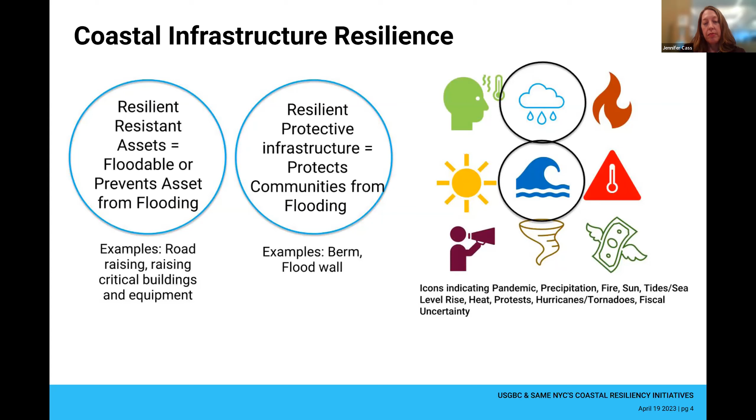The other circle you see on the right is a type of asset that we might build to protect a community from flooding. So Greg is going to focus on LMCR battery, but we have a whole portfolio here that's looking at how to protect Lower Manhattan from flooding again. So that could take many shapes. It could be a berm, it could be a flood wall, many other types of structures, but those are 2 of our prototypes.

So I'm going to just touch a bit on our Raise Shorelines portfolio that we've been working on with Stantec for several years. We conducted a study in 2016 with Moffatt and Nichol that looked at the entire coastline of New York City and tried to identify where sea level rise could be causing flooding for the entire shoreline. And we whittled that analysis down to a shorter list of projects, and through more and more analysis, we identified some projects that were occurring in other areas and projects that did not have any kind of coastal or sea level rise protection planned for it. And we identified these 5 project sites that you see on the screen.

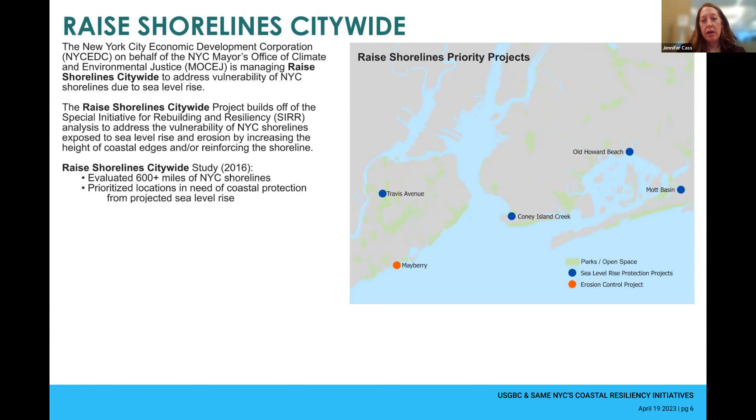So we're going to talk today about Travis Avenue and Mott Basin. It just kind of gives you an overview of the type of projects that you can see through a coastal resilience lens. They're quite different projects, but they both came out of the study and are, like I said, focused on sea level rise protection. The other thing that's very interesting to me about these two projects, even though we are designing for a future sea level rise, both of these locations experience flooding today. So they are really providing immediate benefit to the community.

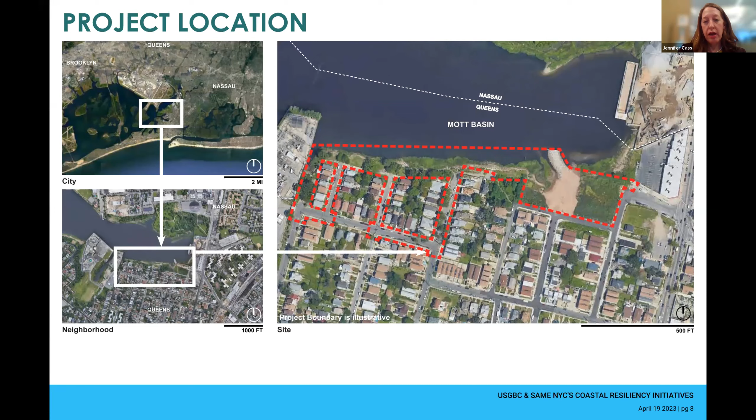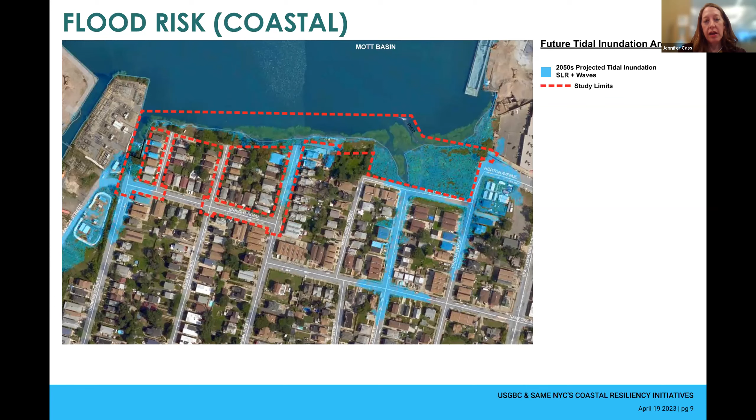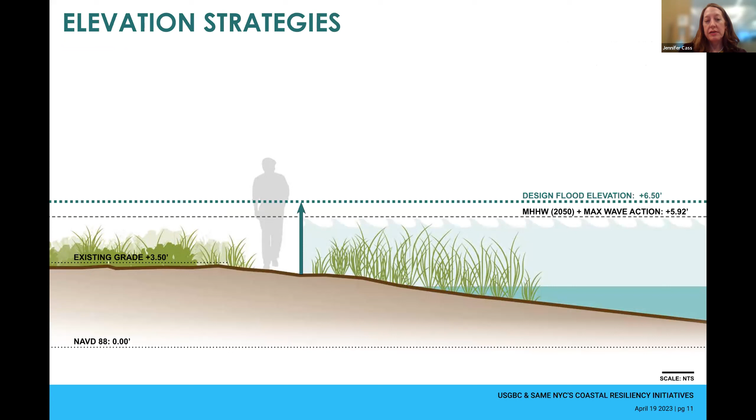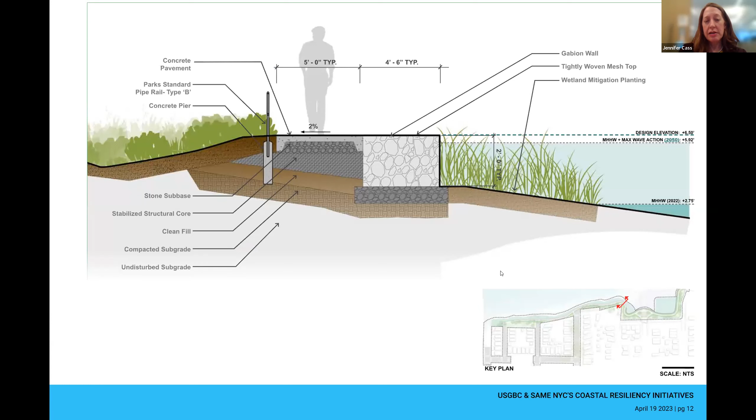So this is the Mott Basin location. This is in Jamaica Bay, right on the border of Queens and Nassau County, kind of the southern shore there. So in the blue, you can see the 2050 projected sea level rise that will come and inundate the neighborhood. But like I said, they do experience flooding periodically today, not quite to these extents. So Greg has put together some great slides that show the existing condition and the mean higher high water. And we're going to progress to show through the 2050s. And then we get up to a design flood elevation of 6.5 here. And the system that we've worked with Stantec to design here is a berm type of wall. A berm/wall, excuse me.

Thank you, guys. We can go back to the previous slide, actually. Yeah, I'm having trouble doing that. We can keep you here.

But we've worked with the City Parks Department. The majority of this project site is on New York City Parks property. And we've worked with them to really create this as an asset to the community. So we're not just building a wall or building a berm that is protecting the community from coastal flooding, but we're also creating an asset. People can have a walkway here. There's benches for a nice stroll along the waterfront, and really provide people access to the waterfront here, which right now is not accessible.

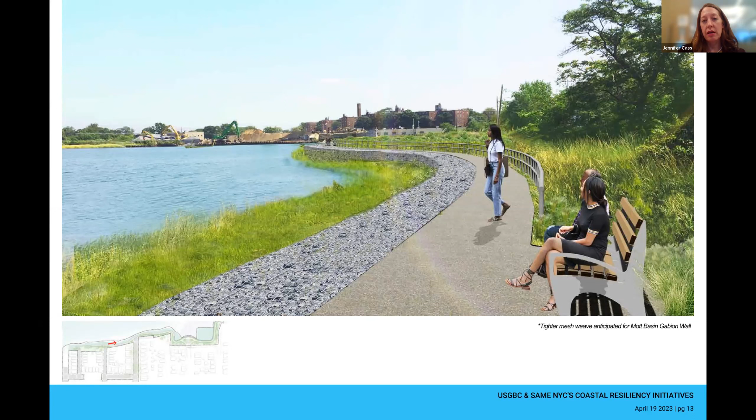Okay, then we're just going to talk a little bit about the Travis Avenue location. That's also part of the Raise Shorelines project. This is out in Staten Island near the West Shore.

Excuse me, getting over a cold.

So this project is in the middle of a wetland, but there's a road here, and like I said earlier, it floods pretty frequently, I think about 10 times a year. This road is not usable. It's a local road, but it is a major shortcut for a lot of the community.

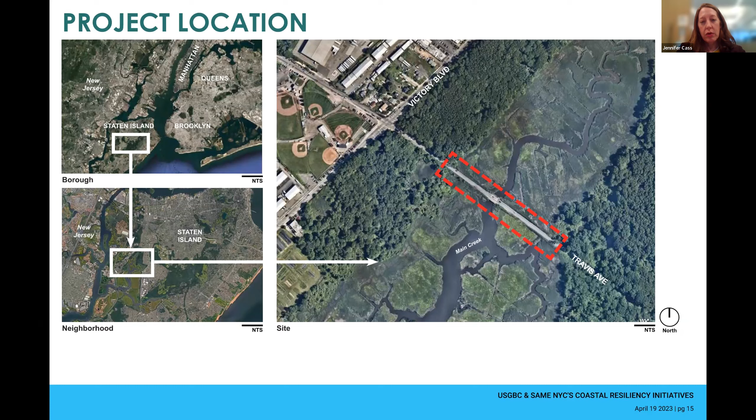You can see the ball fields over there. There's a Trader Joe's on the other side of the road. One of my colleagues actually lives just off to the right of this screen. So there's housing over here. So it's an important road to the city.

And it's really been a long road to get this project developed, but it includes a lot of innovative design features. So we wanted to protect the wetland, like I was saying on our first slide, as much as possible, because on either side of the road, there is a very large wetland that is a huge asset to the city. So by raising the road, we had concerns from the Parks Department that we would not be able to maintain as much flow to the north side.

Excuse me, I'm just going to take a drink of water.

We wouldn't be able to provide as much flow to the north side of the wetland. So we did some analysis with Stantec and found that by adding these hydraulic culverts, we would be able to maintain a more even flow to either side of the wetland.

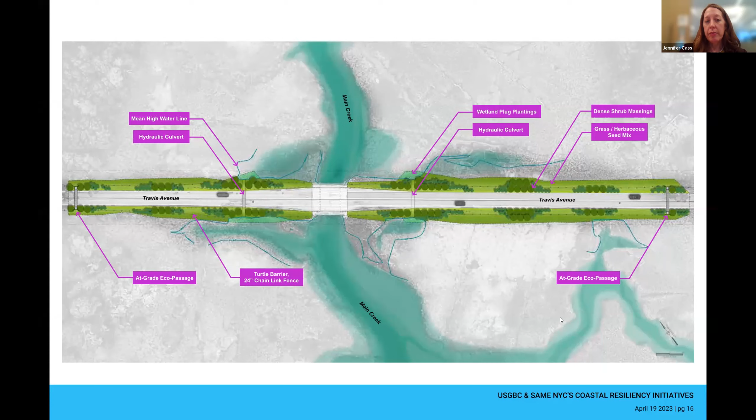The other thing that we did was we have added some eco passages for these little orange turtles you see, although they can be used by any kind of critters crossing under the roadway. And we were going to be the first eco passages in New York City, but I think some were installed out in Queens somewhere already. So these would be the first in Staten Island.

And it's really an innovative design. You can see the grate at the top that provides light. So the animals are kind of welcomed to crawl underneath the road. They're not really enticed by having to crawl through a dark tunnel. But we've heard stories about people having to pull their car over to pick a turtle up and usher them to the other side of the road so they don't get hit. And we hope that this is used by various other natural resources as well.

And the project is interesting because there's a bridge here, you can see, but we are leaving the bridge in place. We're raising the road on either side of the bridge, and that will bring it out of the flood zone so that we can have a more clear passageway, and it will protect this road in the future from flooding.

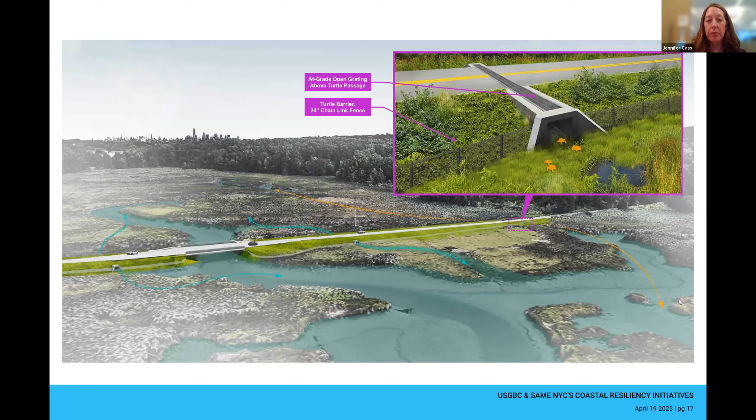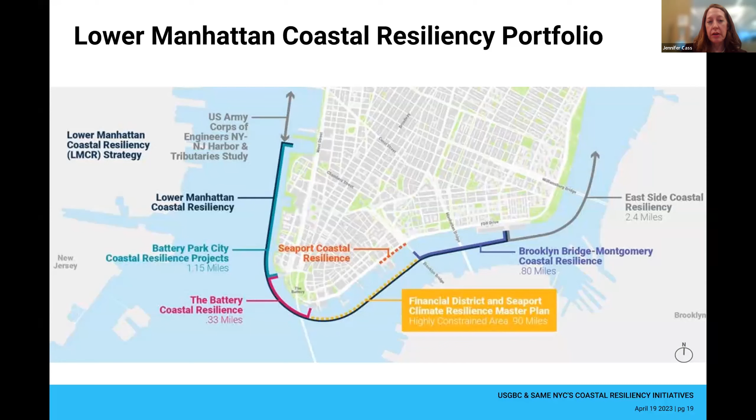EDC is actually working on the section from the Battery, the pink area, all the way up to the blue, the Brooklyn Bridge Montgomery Coastal Resilience Project. But we had done a study that looked at this entire area and identified projects that would kind of spin off of that. Over on the west side, you see also Battery Park City Authority is developing a series of coastal resilience projects along the Hudson. And then we're connecting up to the East Side Coastal Resiliency Project, which DDC is building.

So the way this project has worked is very innovative. We developed a master plan that looked at the entire shoreline. And then as certain projects were identified within the master plan that had fewer roadblocks, we've pushed them forward. So the first project to come out of the original master plan was the Battery. I'm going to leave that aside because Greg's going to dig into it quite a bit. And then the second project to come out of that was the Brooklyn Bridge Montgomery Coastal Resilience Project.

And they're very different projects. The Battery is a wharf raising project, whereas BMCR, as we call it, is actually raising the grade a bit and also providing a series of floodgates. So underneath the FDR over here, there are a series of floodgates that will be installed.

Construction is underway. DDC is managing the construction, and that will actually protect this zone from a 500-year storm.

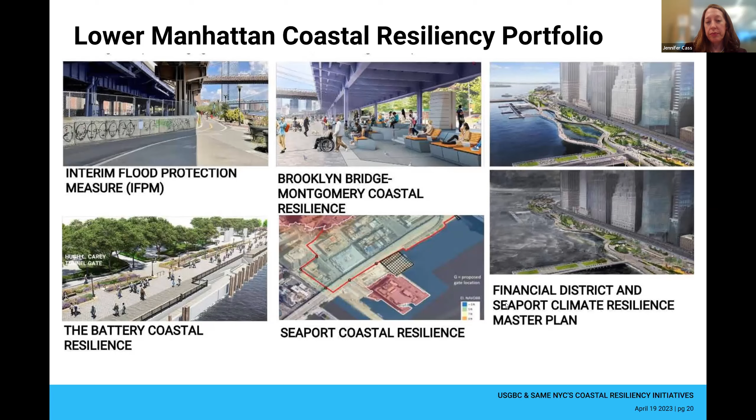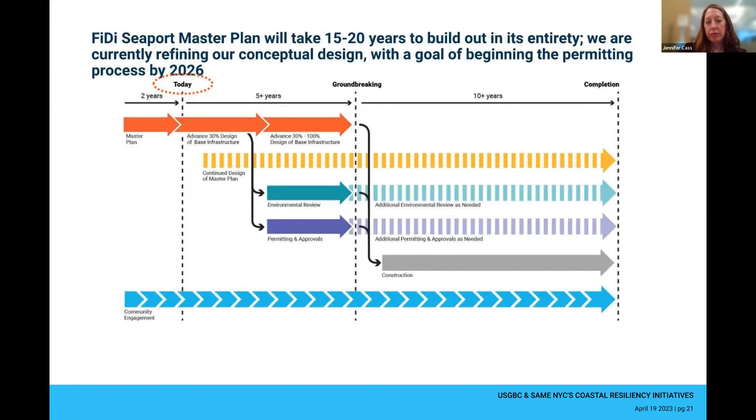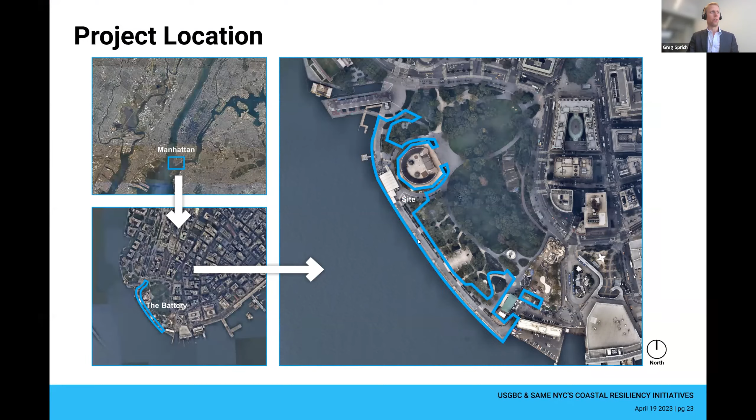Thanks, Jen. Going to talk a little bit about the Battery specifically. This is at the lower tip of Manhattan, as part of that LMCR initiative. And as Jen said, this is a wharf raising project — we are predominantly reconstructing the esplanade and the waterfront structure here at the Battery.

As we mentioned at the beginning, this project and all of these LMCR projects are looking at both sustainability and resiliency, and how those come together — specifically with climate mitigation, preventing future climate change impacts, and climate adaptation, adapting to climate change impacts. They're not independent; these approaches need to be looked at simultaneously in all of these coastal resiliency projects.

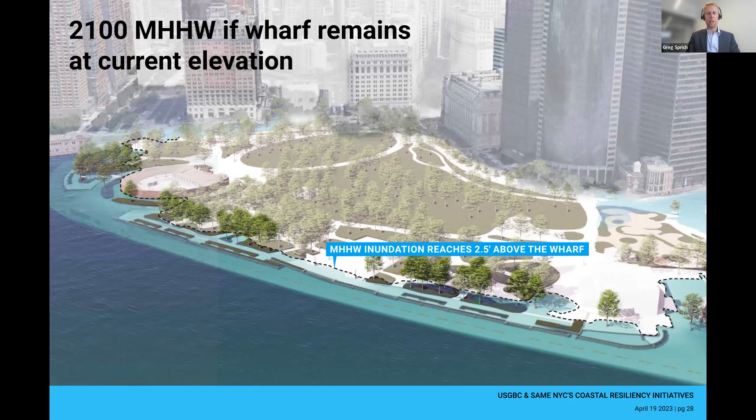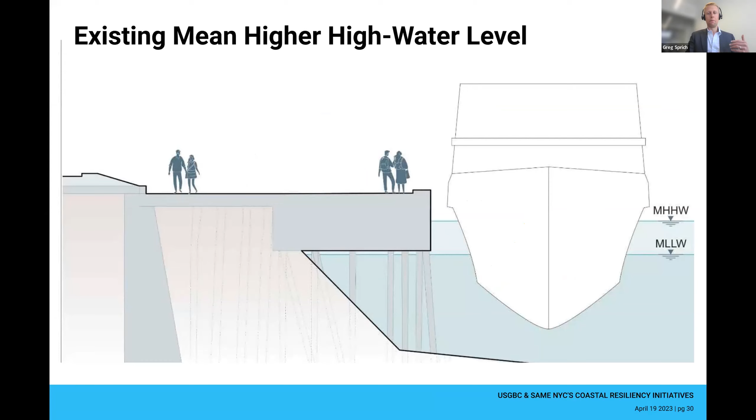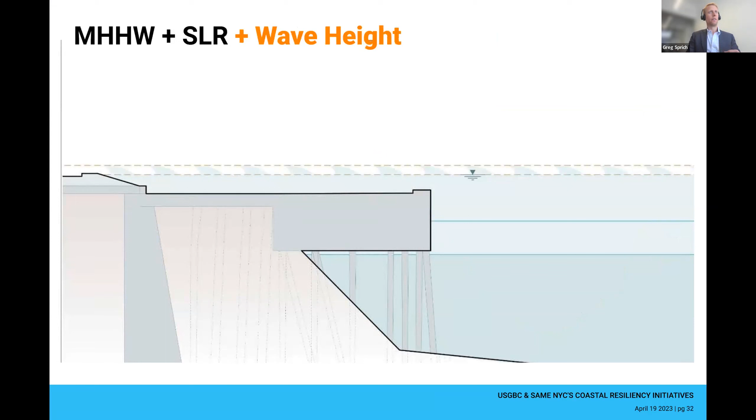Similarly, if you look at the wharf in section, and you add 6.3 feet of sea level rise — that's the 2100 projection — plus wave height and a bit of freeboard, our new wharf design elevation is about 5 feet higher than it is currently today. You can see in this cross section the public berthing vessels in 2100 with an elevated wharf and elevated sea levels is not a problem.

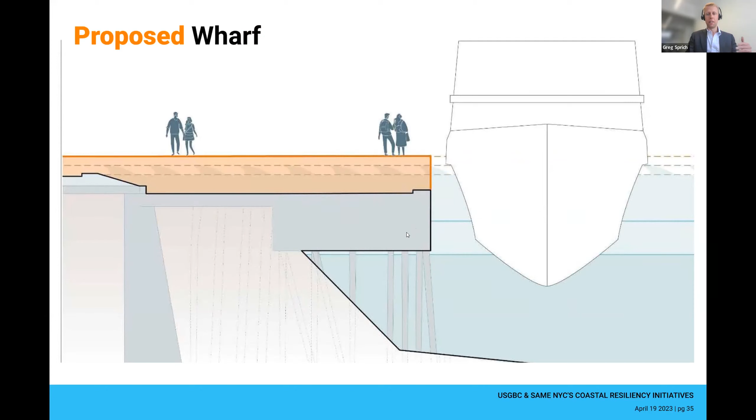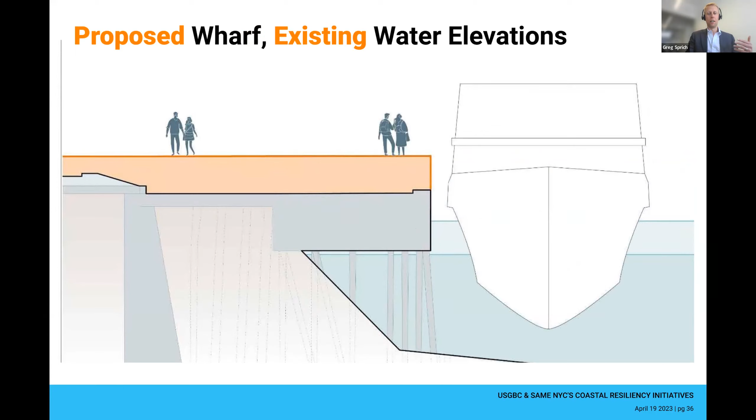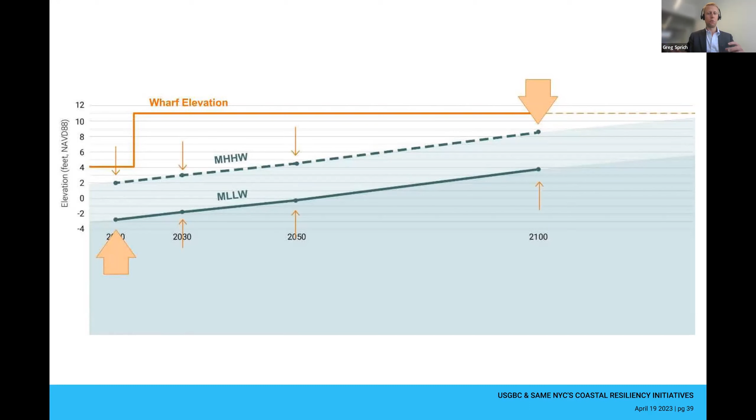However, the wharf must remain operable at today's current levels, which presented a major design challenge for the project, because we're designing for the future but also recognize the importance of accounting for present day operability and livability. So we couldn't just design for two endpoints of the project — as soon as it opens and then looking ahead 80 years to 2100 — we also needed to consider all of the points in between, as sea levels theoretically rise gradually.

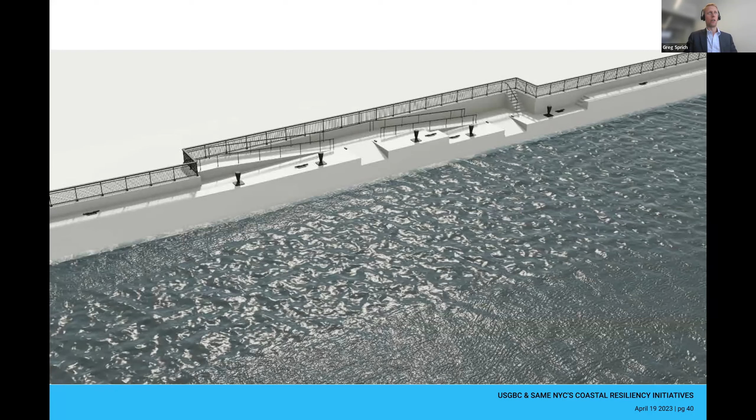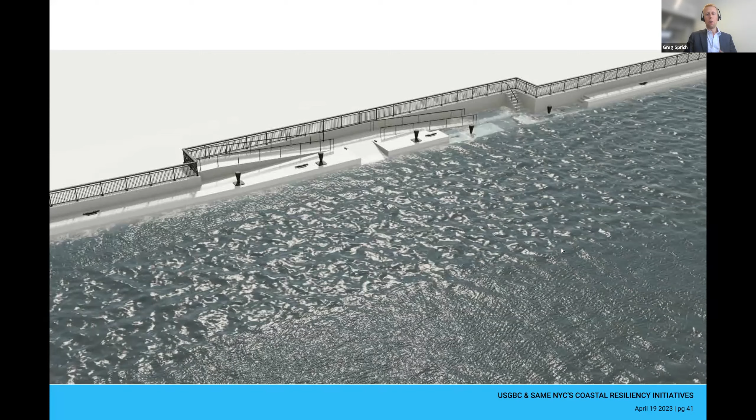So for the Battery, the design solution became a series of ramps down to two boat slips at differing elevations. Even in today's condition, both slips can be utilized based on low or high tides, and as sea levels rise, vessels will tend to use the higher slip more frequently. If sea levels rise as predicted, we recognize the lower slip will flood; however, the wharf design allows for this structure to be adaptable and flexible, so it can be built up to account for rising sea levels without having to fully rethink or redesign the structure — making our project adaptable and flexible for the future.

So specifically, spoke a little bit about how the project adapted to climate change, but how did the project mitigate against climate change or provide climate mitigation?

So we really looked at reducing greenhouse gas emissions by performing a life cycle assessment across all the proposed materials of the project. Simply put, the life cycle assessment means evaluating environmental impact of a product through its entire life cycle - the extraction of the material, the manufacturing, the transportation for how that material gets to the project site, the construction, and end of life.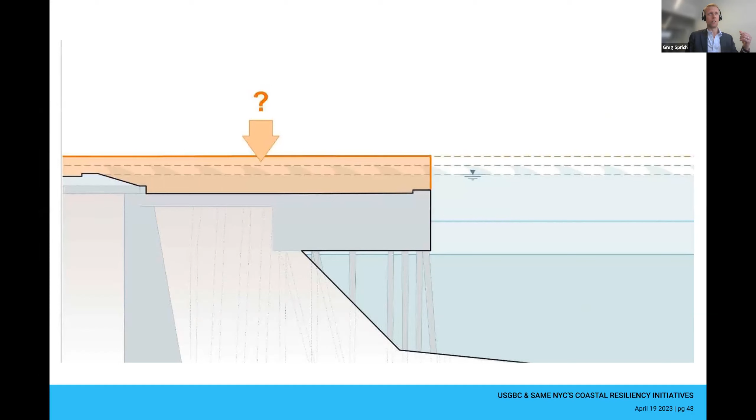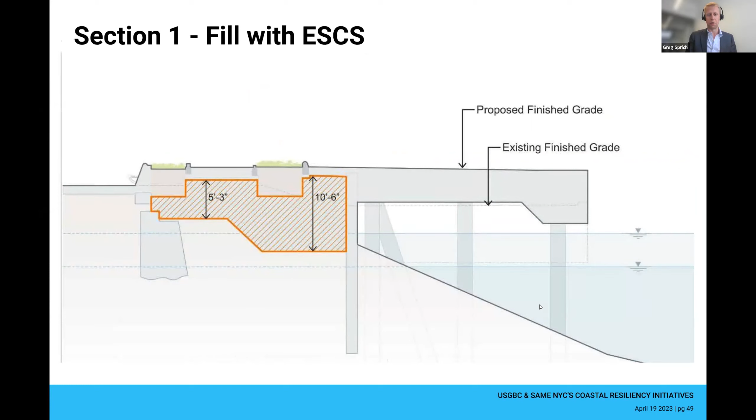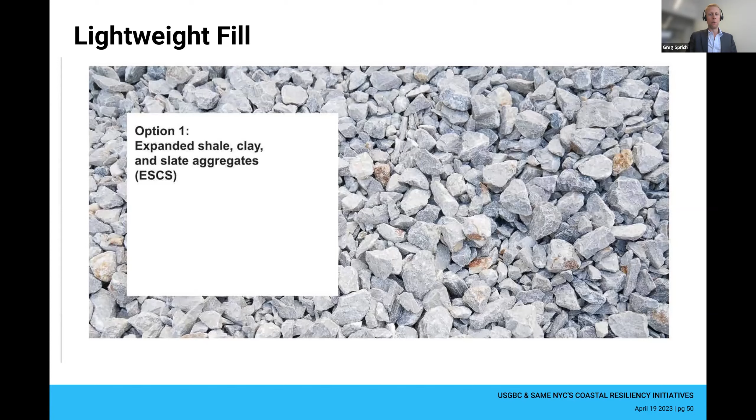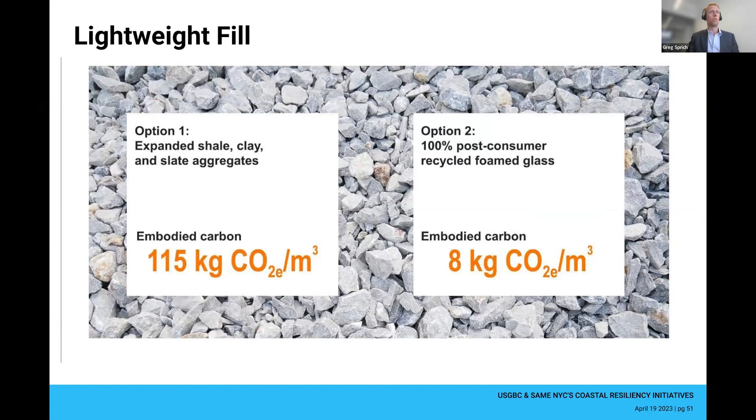So naturally, the initial thinking is you need to incorporate some sort of lightweight fill. We selected a very typical, frequently spec'd material of expanded shale. But because we had the life cycle tool, we were able to locate another material with significantly less embodied carbon in foam glass aggregate. Foam glass aggregate is made of 100% recycled post-consumer glass, and also locally sourced. So we were very happy to find that alternative.

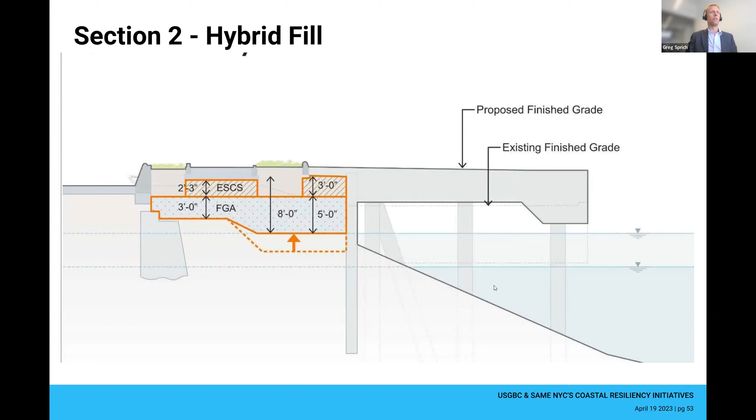And actually, due to the foam glass aggregate properties, we reduced the amount of fill needed, which reduced the overall excavation on the project. More importantly, it pulled the excavation depth up, which actually brought the project out of the groundwater table. So that was a great win as well.

So altogether, having that tool and that additional data generated from the life cycle assessment, we were able to select the material that reduced the project's embodied carbon footprint. It provided savings to our client and provided a higher level of constructability when working with fluctuating groundwater levels.

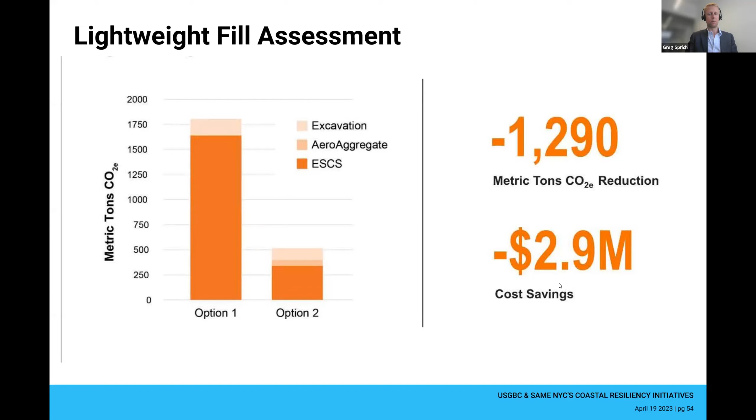Oh, and then just the last thing - overall for the project, we were able to specify some low carbon concrete and steel alternatives. And then in addition with the lightweight fill, we actually achieved an overall reduction of 27% in carbon emissions. That's actually the equivalent of 10 million miles of cars off the road. So we were pretty proud of the achievements that we had overall with the project.

The battery is our first Envision project. We're very happy to see that moving forward. But you'll see that in more of our RFPs going out. And then LEED, we are required to use by local law, but we are really trying to apply it to any building projects, no matter how small, going forward.

And then everyone is aware of a variety of local laws. Maybe you're not aware - I am aware of a variety of local laws and executive orders that have come out recently. And some of those overlap with Envision and LEED, and some of them are really independent of that, pushing the ball forward. So this sort of makes up the way that we're framing out our sustainability and resilience work going forward.

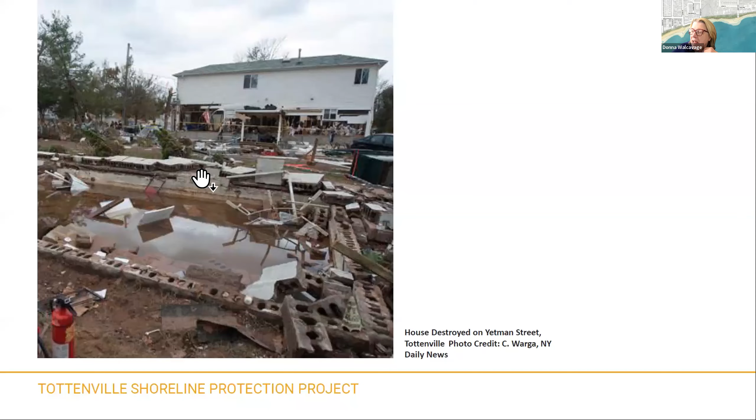I'm going to talk about a very different location, still within New York City. Last fall we commemorated the 10 years since Hurricane Sandy shattered our illusion that New York City was indestructible. No matter how many predictions were made by climate and earth scientists, we were still in denial when Sandy struck in 2012. This is Tottenville, Staten Island, where houses were swept off their foundations and many completely demolished by wave action, with sadly loss of life as well.

After Sandy, we all started learning the alphabet soup of disaster rebuilding funding agencies and governing agencies, and many of them have come to play in this project.

The project arose from the New York State Governor's Office of Storm Recovery planning in Staten Island. This was one of the projects put forth from the plan developed there. It was to design stone core, sand-capped dunes, including beach access.

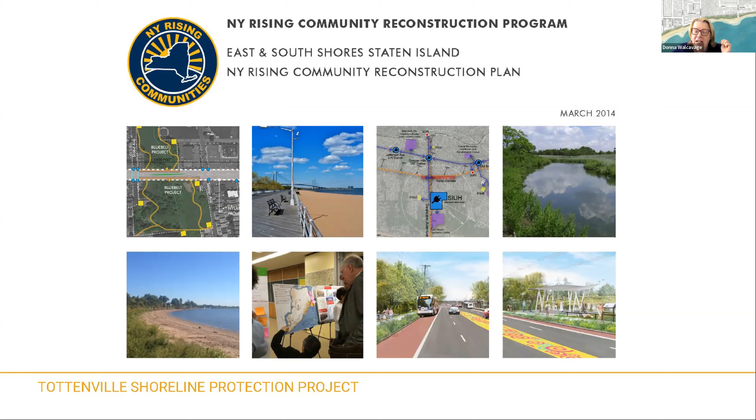Note that the beach we're going to look at is not a swimming beach. It's to walk, to fish, to dig for oysters. It's not something that's going to attract people from all over New York City. It's really pretty much a local beach.

This is a FEMA acronym that shows a line where moderate wave action occurs, which despite the term 'moderate,' is really very destructive. Of course, if your house is within that LiMWA zone, you have very high flood insurance rates.

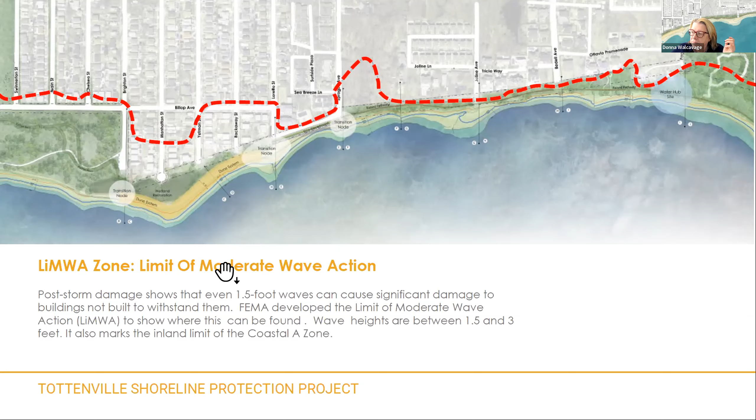Our project aimed not only to protect the community through risk reduction, but to get it out of that LiMWA zone, where hopefully when FEMA looks at the project after it's built, they will move the line and people will be more able to get flood insurance at a lesser fee.

The project had a very strong community input process. This was a companion project to the Living Breakwaters, which is currently under construction. The two projects act together to reduce wave action, but there were several other goals: ecological enhancement, social resilience to allow people to more fully access this beach for walks along the shoreline and upper level, and attenuating wave energy, addressing shoreline erosion.

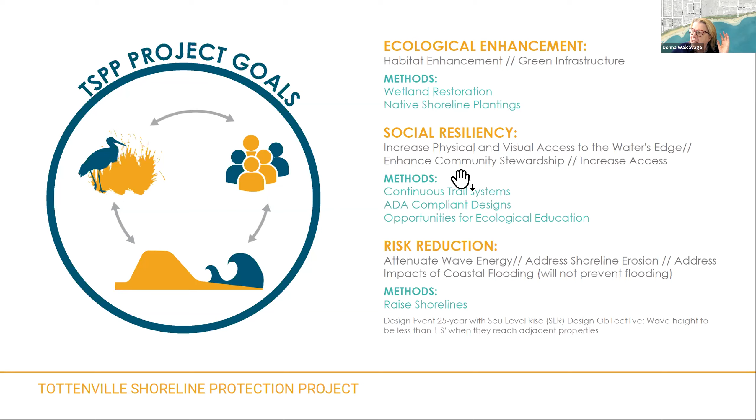Part of having conversations with the community means learning this is not what they wanted. We actually designed a structure that would prevent flooding because they asked us to do that, but when they saw what it was going to do to the community—and trust me, it was nicer than these flood walls—they really did not want their view impacted that way. It would also have meant pumping stations would have to be built in this area, and you would have quickly gone right out of any reasonable budget for the project as well.

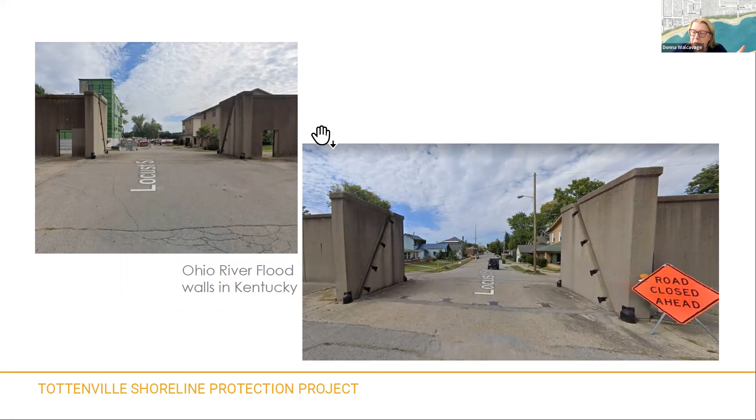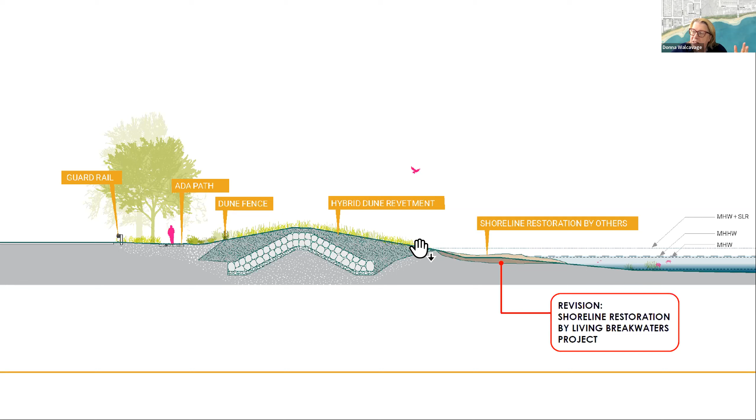We quickly realized that the area to the north of the park was also within the LiMWA line, and Parks was restoring the maritime forest there. We also added a berm system through the park that would alleviate the flood risk and wave damage risk upland from it.

And then if you look at the LiMWA line, after this point it's no longer within an area that has residences in it. It's in a wetland. There's a wetland behind this park, and then it comes very close to the shore. So those buildings are out of the LiMWA line.

We needed additional funding, and we went to the Mayor's Office of Storm Resiliency at the time, and they actually added a piece of that raised shoreline project here, as well as the funding for it. Eventually, we still didn't have enough money, but we did get a federal grant for it.

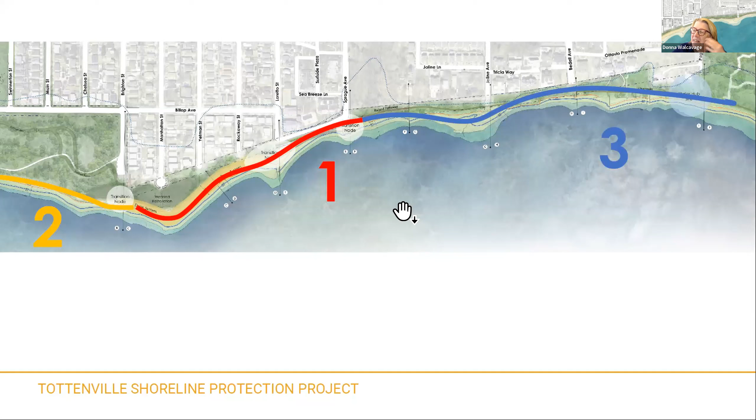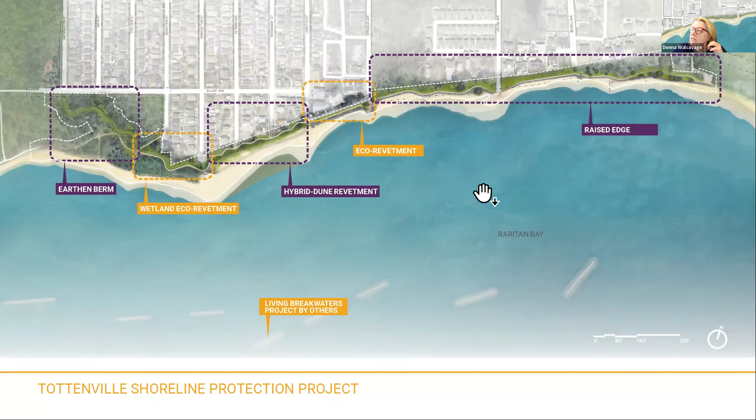So I'm just going to go through quickly. I realize we're very close to our end time. So these are the various types of structures that we designed in the various places, and I will go through them quickly. These are the living breakwaters that are currently under construction. These are earlier drawings. They've changed configuration many times.

So part of the thing that Parks, who owns this property, really wanted out of the project was a way for their little maintenance vehicles to run through the upper part of the park, which goes all the way to the very southern tip of the island, so that they could do better maintenance. It was just overgrown in that area and was difficult to manage. So that path doubles as access for the community along the back of that project.

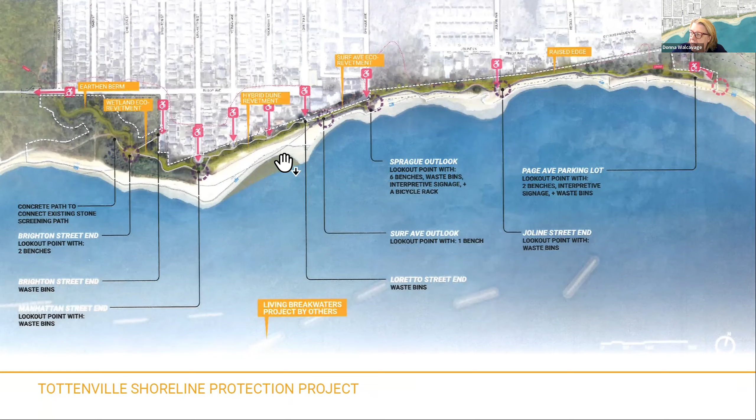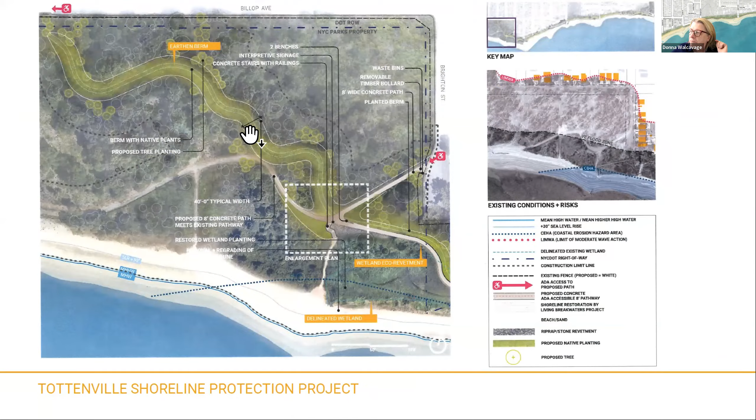And we came up with multiple areas. So here you see that earthen berm that I mentioned. And here is a view of what it will look like to walk through the park when that berm is in place. We also found a tidal wetland that was damaged when temporary dunes were placed after Sandy, but I think it had been damaged much before that.

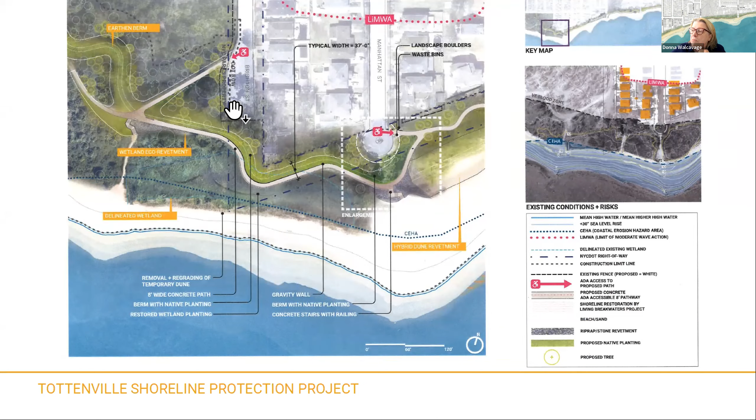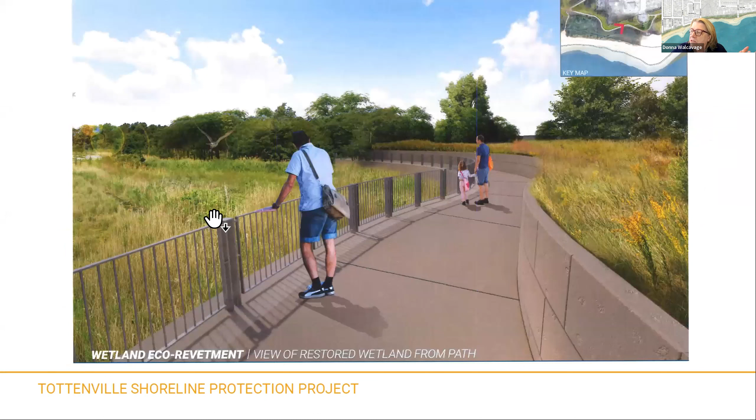And we are restoring that wetland by removing the temporary dune and creating what's called eco revetment, which is a very narrow space that continues the pathway and allows people to see the restored wetland from the path. There's also some places where there is access to the beach.

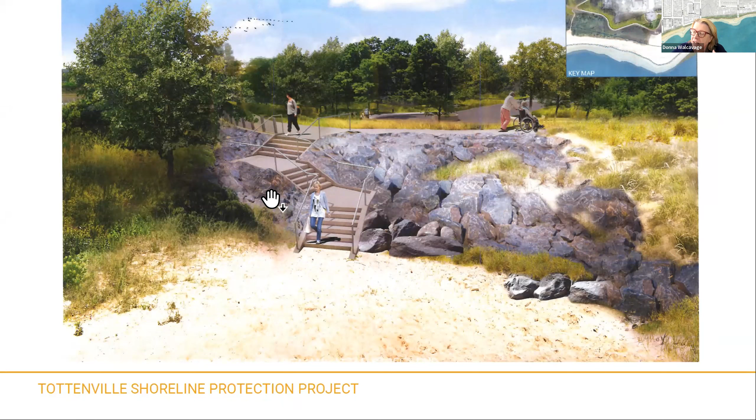You know, wheelchairs actually can't access the beach except at one point because it's sand. Parks will be bringing out Mobi-Mats in the summer for special programs, so the wheelchairs can move along the beach. This is the area where the dune actually worked. So as you can see, it's about 3 blocks, where there's also shoreline restoration that's being done by the Living Breakwaters Project.

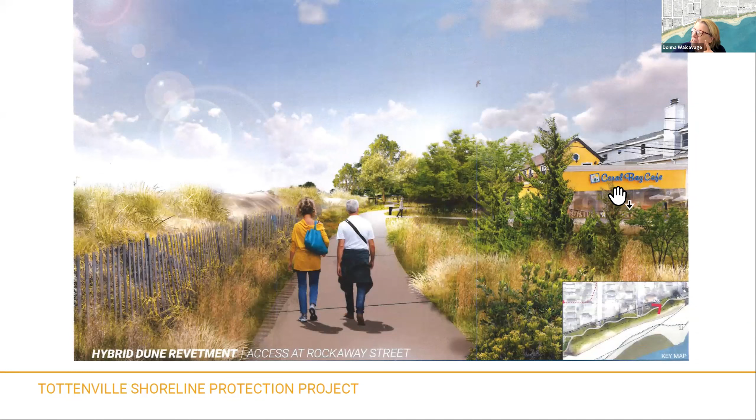And so this is that area where the temporary dune is being removed and the reinforced dune is being added. And that's what it will look like to walk along that path. This cafe, by the way, was almost completely destroyed. Just enough of it stayed there so that they could keep their grandfathered license for having a restaurant at that location.

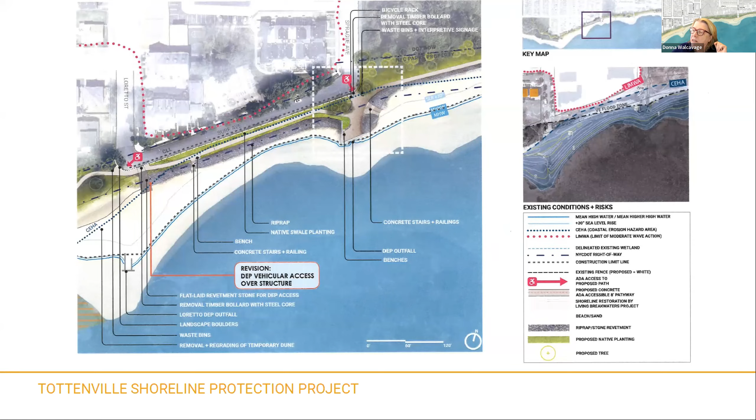This is again a very narrow area where you also have 2 sewer outfalls at each end of that block. It's the only place where the road, Surf Avenue, was actually built out. We're using some of the right of way to do this project, and at one place there is a concrete platform over the sewer outfall, and we've turned this into a plaza for people to use to look at the water.

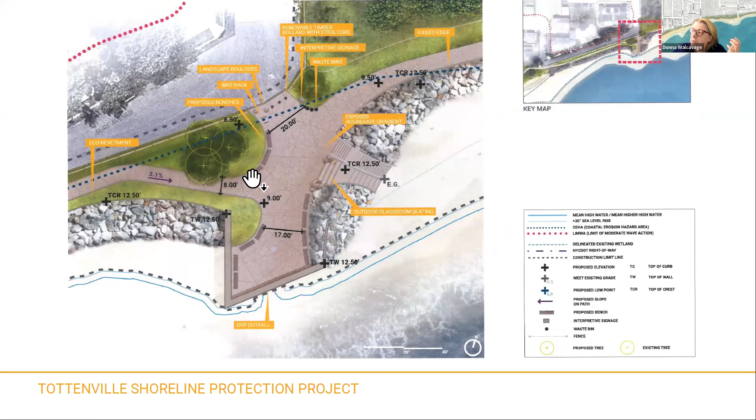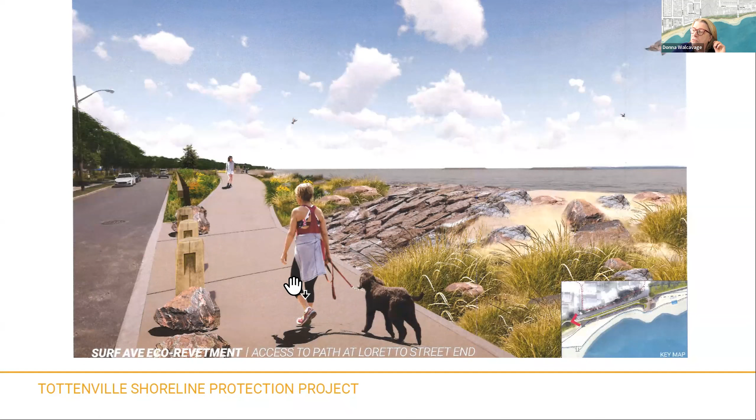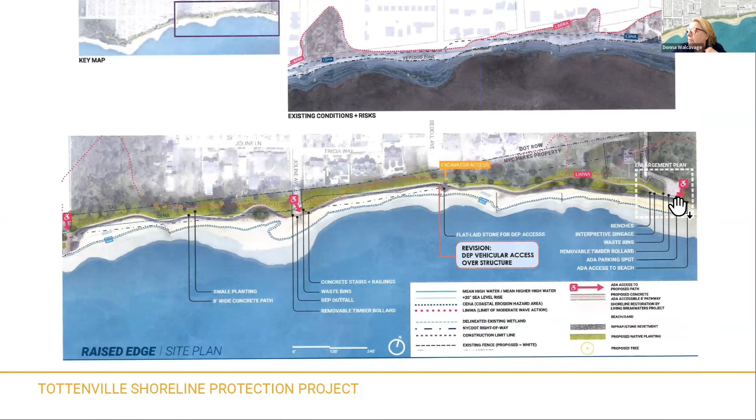And walking along, the other sewer is being protected by the stone paving, and that stone will also allow DEP's trucks to get down there to do maintenance. And the raised shoreline portion goes all the way to a small parking lot that's used for the park, which will be made accessible. And as I said, this is the area where the Mobi-Mats were put out in summer programs. And as you can see, there's a ramp here to get down to.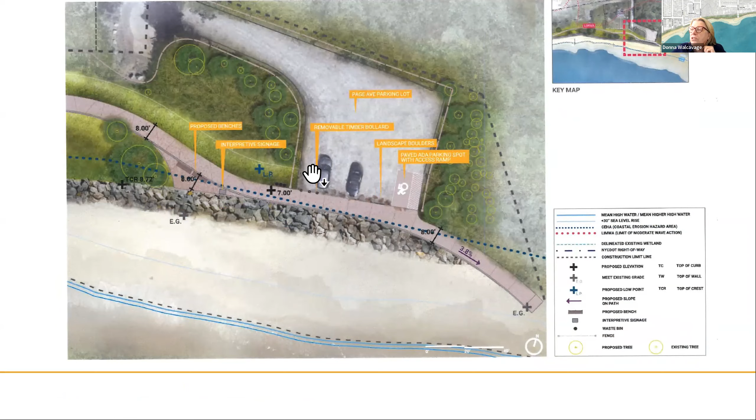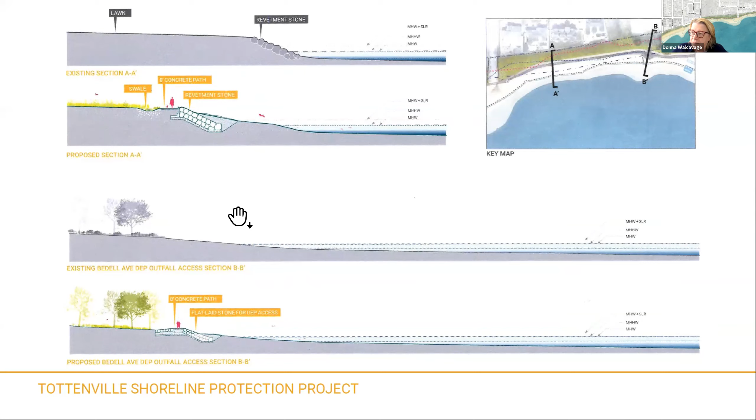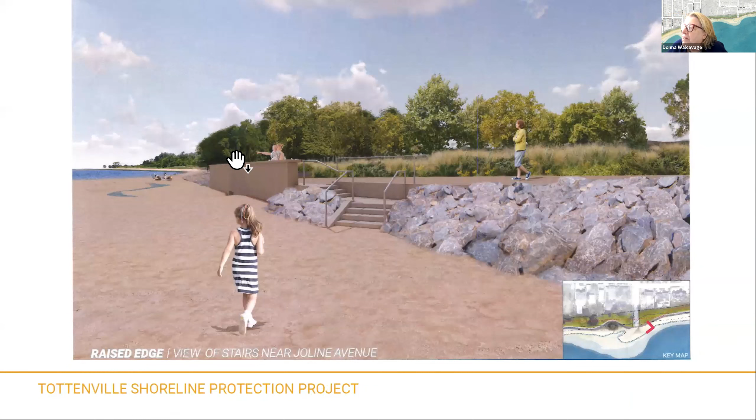And these are just some sections of the raised shoreline portion where the changes to the shoreline are very subtle, just enough to get that walkway in and to meet the new mean high water requirements, which Greg and Jenn explained very well, so I won't do that too. And again, this is another view of another access from that raised edge. A view along toward the water.

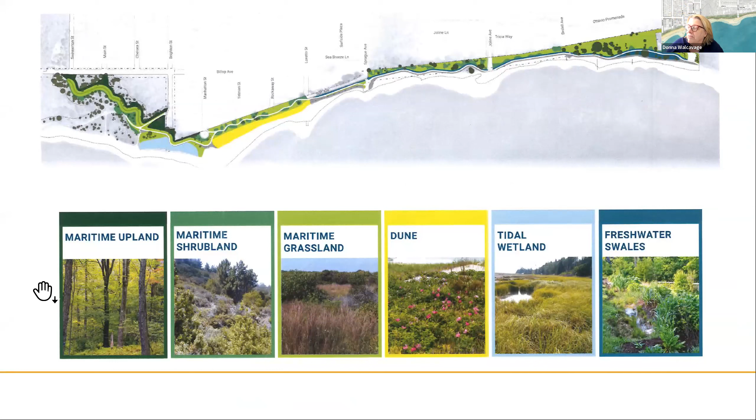And then it's all native planting, and we're restoring these different environments within this project all along the way.

So I really just want to say that these projects take collaboration among professionals with everything from coastal engineers, structural engineers, landscape architects. We led the project, and I will speak strongly for landscape architects, at least being part of the leadership of the project, because we need to find ways to create really great places.

We can't design for the last disaster, so we can't go in and clear cut all the trees because we want to build a wall or do something else, because as Jenn pointed out, more people die from extreme heat than all the other natural disasters put together. And then it's really important to have community input. And that is a segue to Nora, who does just that.

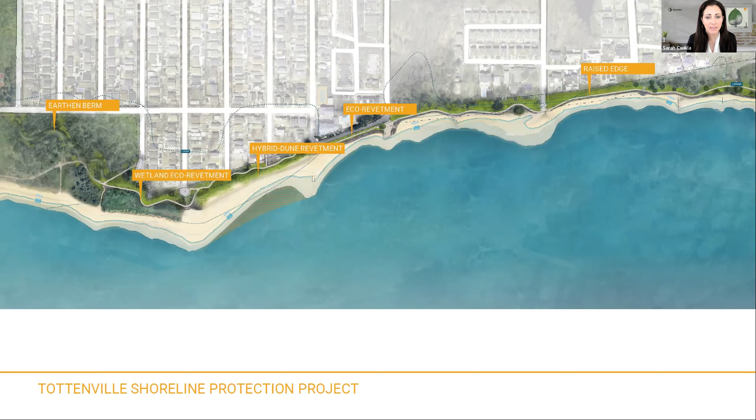Thank you so much, Donna. So Donna, if you would stop sharing your screen, and Nora, you can pull up anything that you would like to share, but you've been making sure the communities adjacent to these types of projects that we've been discussing today feel empowered all over the country. Can you provide some examples of some of your successes and what you think that we should be doing with all of these projects moving forward?

I most certainly can, and I'm excited to talk about it. You know, I was watching all of the presenters before me and thinking about the public and listening to all of that technology, which is so important, and thinking about how the public finds itself in that and how it can have a say.

What I want to talk about today is the challenge and opportunity around coastal resilience projects, and I'm going to be using a project we're working on now, the Battery Park City Resiliency Project in the Northwest area of Battery Park City, to talk about not only how we're engaging the public, but how public engagement has changed since the pandemic. And it's an important issue that we all have to consider.

So coastal resilience projects are unusual in several ways, and they require that we have these very high stakes conversations in affected communities. And what do I mean by high stakes? Not only are we talking about projects that are related to safety and protection, but we're also talking about projects that affect the way of life for people in those communities. And the decisions that come out of those conversations are in fact going to impact lives and livelihoods. They will require changes in how people live. Some of those changes will be very welcome, and some may be more of a challenge.

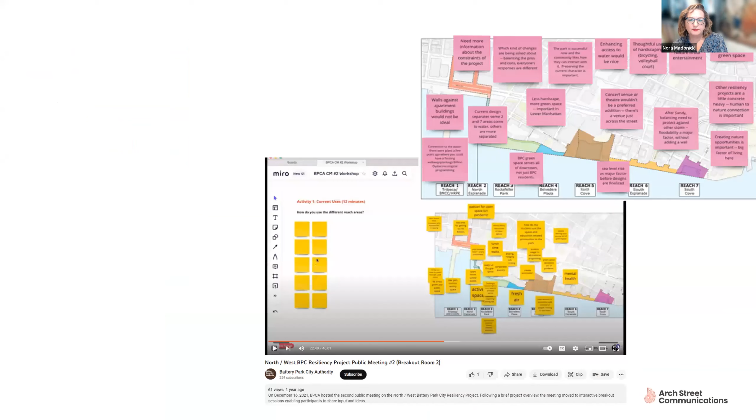But you have to remember that there is a contingent of people, there's a large group of people that don't want to meet in person. They don't want to show up in person, or they can't. And so you have to make sure that there is a way for everyone to have their say. And here we used an online tool. We used something called Miro to set up breakout rooms with whiteboards, and essentially went on the same walk for those who wanted to participate from home.

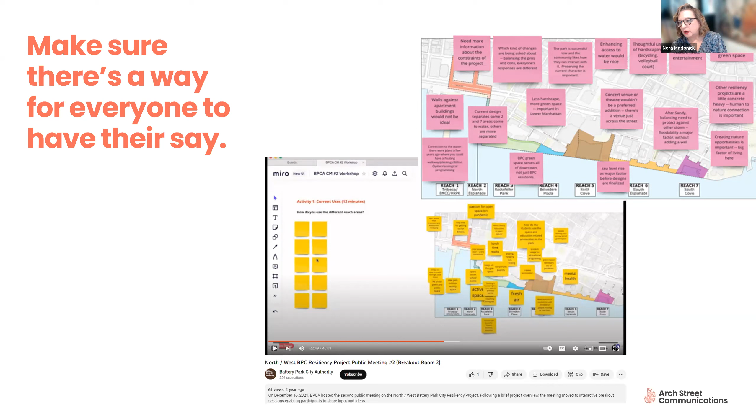We think that there is a tremendous opportunity in the coastal resilience work that is happening in Battery Park City and then all the way up the coastline in that big U area and elsewhere, to reconnect communities, to connect them around a shared issue, one that we have to solve, and through that to increase confidence in the outcomes. It's important because the more voices that we hear, the better the outcome will be.